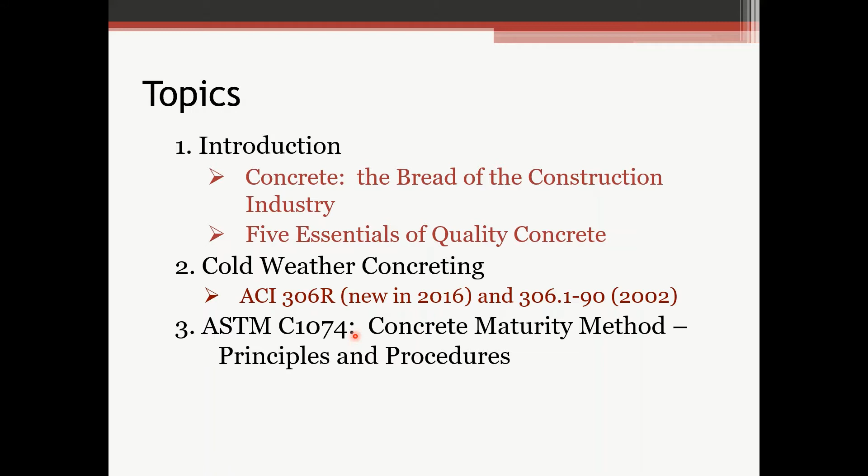I'm going to have a brief introduction on concrete, the bread of the construction industry, and the 5 essentials of quality concrete. Then we'll get into cold weather concreting. It's really going to be most of this information, and it comes out of 2 ACI documents, 306 and 306.1. At the end, we're going to talk about the maturity method, ASTM C1074, which is a non-destructive way of estimating concrete strength.

So the bread of the construction industry, concrete. When you think of bread, it's kind of a dietary staple, kind of similar with concrete to the construction industry. It's widely used, it's kind of a staple of the construction industry. It's the second most widely used material in the world, next to water, and a lot of water goes into concrete. Here we've got a general makeup of concrete by percent, by volume: 6% air.

This can obviously change depending on the application of your concrete. About 11% Portland cement, 41% gravel or crushed stone, that's your coarse aggregate, 26% sand or fine aggregate, and about 16% water. Again, these are just general numbers. It'll be different just depending on the mix you're using and what the application is for.

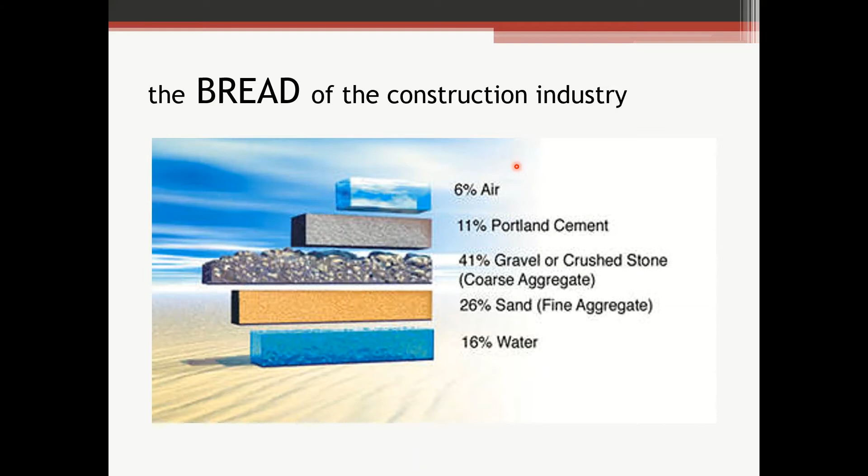But I like the term the bread of the construction industry. I didn't coin that myself, but I think it's fitting. Pretty much all the ingredients in concrete are right here in front of you, other than maybe some admixtures for the air, or controlling or changing the slump, or something like that. But similar to bread, bread doesn't have a whole lot of ingredients, but each one of them is important. And just like bread, concrete, you've got to have some quality materials going into it.

The materials need to be suitable, compatible with each other. Some admixtures are not compatible with each other. Some aggregates are not very compatible with cement, and they can react negatively and cause problems. So you want suitable, compatible materials. It's got to be mixed properly, proportioned properly, again specific to the application: interior, exterior, high performance concrete, lightweight concrete, whatever the application is.

It's got to be proportioned, mixed, and transported. A lot of people don't think about the transportation of concrete, but there's some places in the Adirondacks where concrete plants are not nearby, and you might have a long transit time. So that should be taken into consideration.

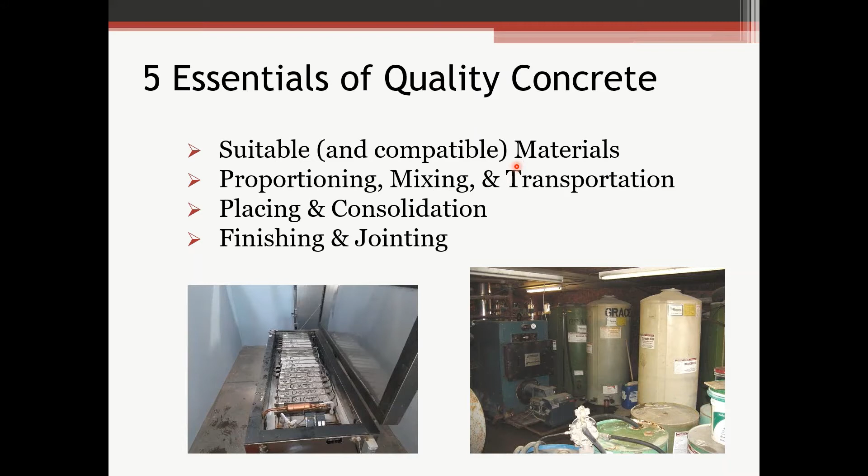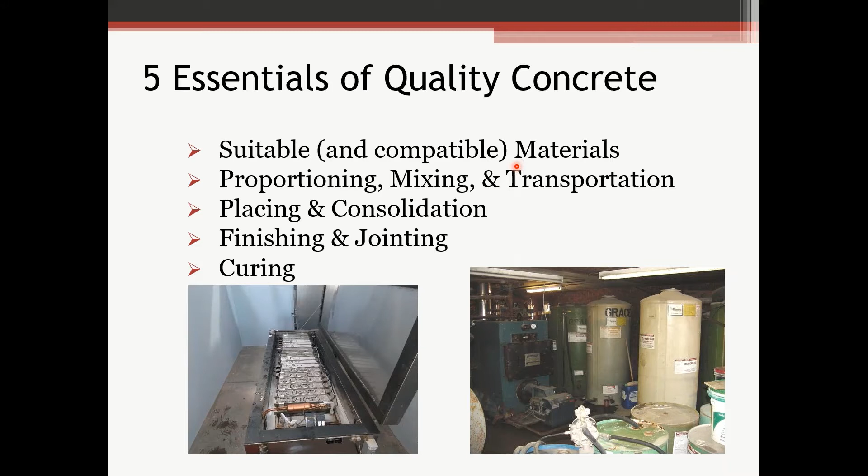Placement and consolidation. Obviously it's got to be placed, consolidated properly, and then after that you've got finishing. If it's flat work, jointing, if you've got construction joints or control joints or whatever to control your cracking, and then you've got to cure it. After you're done finishing it and jointing it, you can't just walk away - you've got to cure it and protect it properly, which is a lot of what we're going to be talking about today.

So cold weather, what is cold weather? How is it defined? ACI has a couple of different definitions for it. ACI 306.1 - I should have pointed out, the presentation is based on ACI 306 and 306.1. 306 is a guide to cold weather concreting, and 306.1 are the ACI specifications for cold weather concreting, and they can be incorporated into your project just by reference. 306.1 defines cold weather as 3 consecutive days where the average temperature is below 40 degrees, and they just take the average as the high and the low. That's it, it's not a weighted average or anything like that - it's just the high and the low for the day.

So average below 40 degrees and less than 50 degrees for half of any 24-hour period. So it's kind of weighted to a certain extent by that, but not necessarily. And then 306, the 306 definition, is when air temperature has fallen to or is expected to fall below 40 degrees during the protection period. So we see that 40-degree temperature is certainly a common theme here. Probably the most common definition is that top one - that's the one we see a lot of times in specifications, or maybe other agencies like New York State DOT or other agencies may have different definitions of cold weather when placing concrete. But these are the two definitions that ACI uses right here.

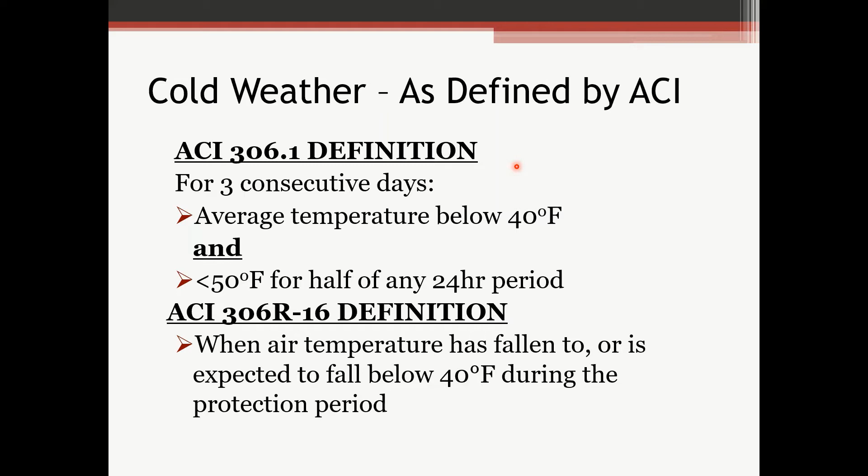So why are we talking about it? I don't know where everybody's at right now. I'm in upstate New York, just outside Albany. Starting to get cold. It's been relatively warm recently, but starting to get cold.

Construction doesn't stop when it gets cold, and there's a lot of ways that we can safely place concrete and still have it be durable, make adequate strength, and be durable.

So here's a project that's local to the Capital District, Albany area. This is Rivers Casino in Schenectady. This was done, maybe 7 or 8 years ago now. But you can see this was done in the wintertime, and I'm going to be referring to a lot of pictures from this project because the team did a pretty good job with cold weather protection on this one.

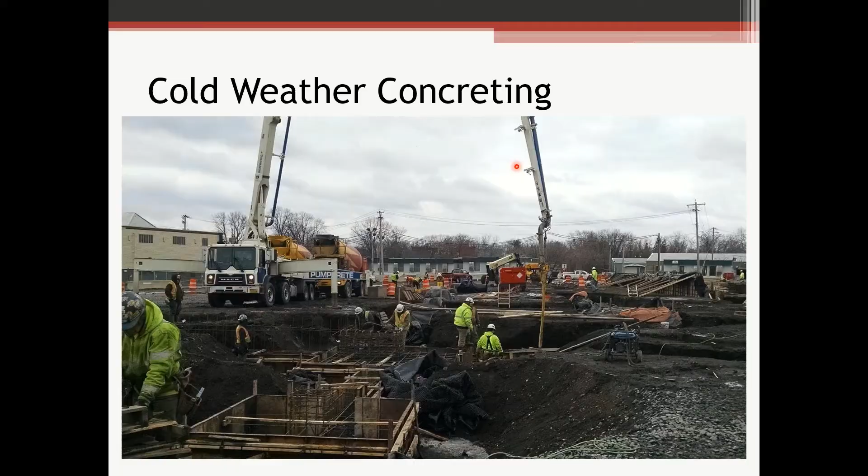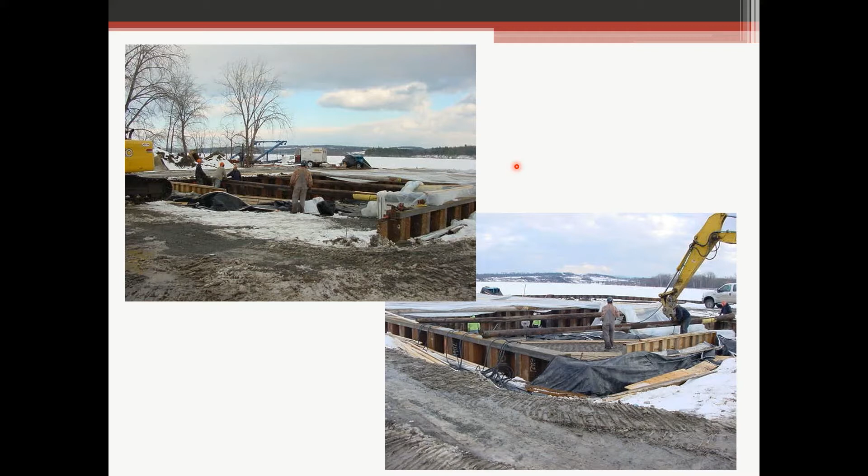Here's another project. I think this is, I didn't take these pictures, but I think this is in Ticonderoga, up around Lake Champlain. You can see it's obviously wintertime. I'll show a couple more pictures of this project also.

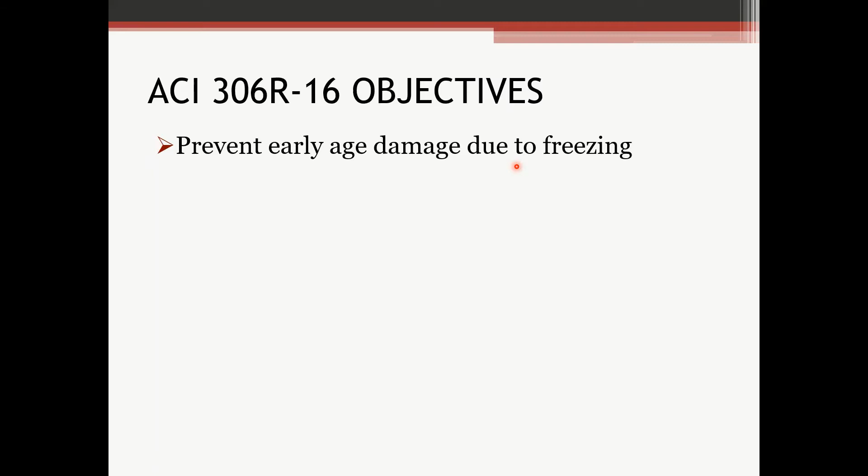So ACI 306, again, that's the guide to cold weather concreting. Objectives, main objective: prevent early age damage due to freezing. We want to ensure adequate strength gain development during and after construction, certainly during construction. Maintain curing conditions that promote strength development. We want it to make strength, obviously.

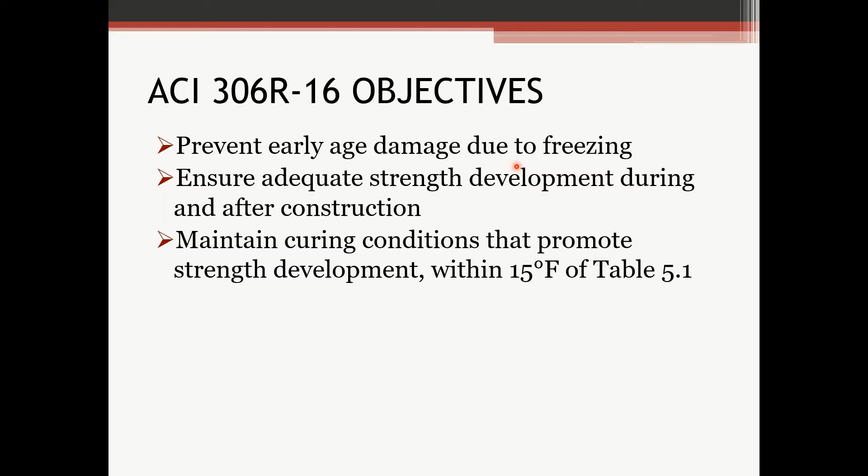Get within 15 degrees of table 5.1. I'll talk about table 5.1 here shortly, but table 5.1 has got minimum placement temperatures. There's a maximum placement temperature also. ACI recommends that you not be more than 15 degrees above the minimum placement temperature. So there's not a very big window in there for placement. Again, that's in 306R. Limit rapid temperature changes, which may cause cracks due to thermal stress. We'll talk about that.

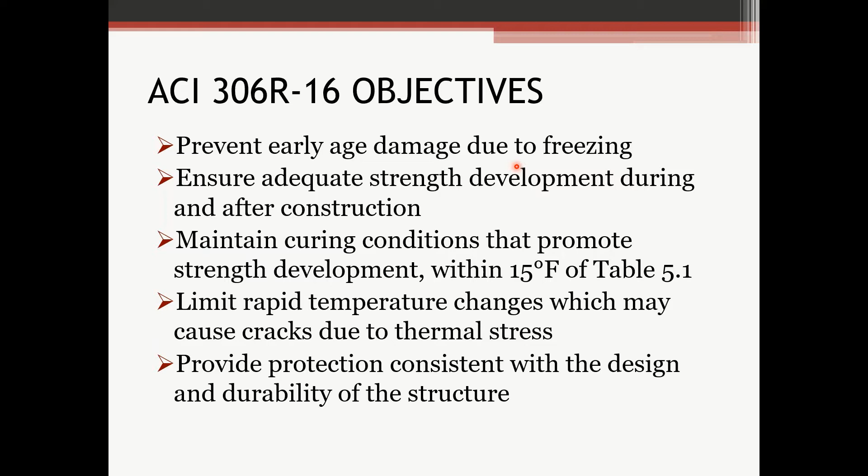And providing protection consistent with the design and durability of the structure. So these are all the objectives in 306R. Again, 306R is the guide to cold weather concreting. It's not a specification, it's just a guide. It's got a lot of really good information in it. I think it's only like 30 or maybe 35 pages long. It's a pretty easy read, and I certainly recommend reading it, it's a lot of good information.

So preventing early age damage, probably the most important thing is protection and planning. Planning for sure, you know, it doesn't just happen organically. So preventing early age damage, about 500 PSI will provide us one freeze-thaw cycle of protection. And we can usually get 500 PSI within 1 or 2 days after placement at about 55 degrees. That's a general guideline. Again, that's going to be specific to the mix.

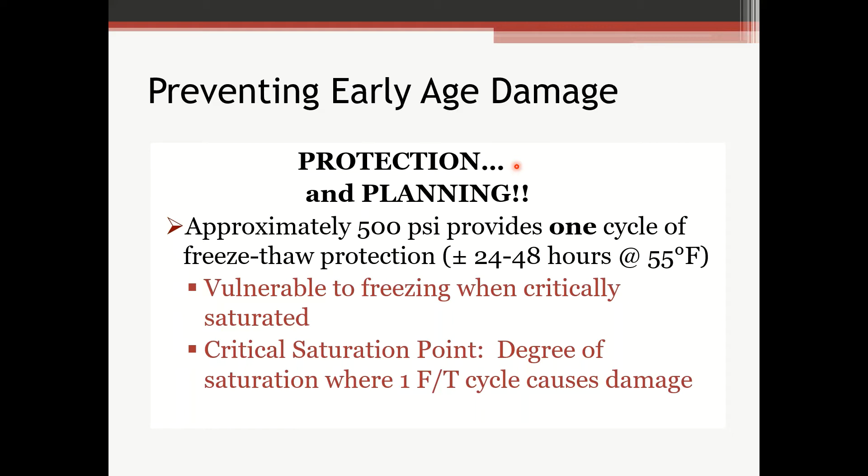If you've got multiple freeze-thaw cycles, that 500 PSI certainly isn't going to hold up to that. But one freeze-thaw cycle at 500 PSI shouldn't see anything harmful. It's obviously vulnerable to freezing when it's critically saturated early on. The concrete's still got a lot of water that hasn't, the cement hasn't hydrated, and that critical saturation point, that's the degree of saturation where one freeze-thaw cycle causes damage. That's how ACI defines the saturation point.

So prior to placement, these are ACI 306.1 requirements. So if your project or if you're referencing 306.1 in your project, these are all part of the specifications in 306.1. Concrete's got to be air entrained if it's exposed to freezing and thawing during the construction period. A lot of people don't think about that, but if you've got flat work, interior flat work that's being placed in the middle of the winter, obviously it's going to be exposed to freezing and thawing, or could certainly be exposed to freezing and thawing. That really needs to be air entrained to protect it.

People out there are going to scream and holler about the slab peeling up and not being able to finish properly. It could cause finishing problems, but as long as the finishers and people doing the flat work know that it's air entrained, it can be handled properly.

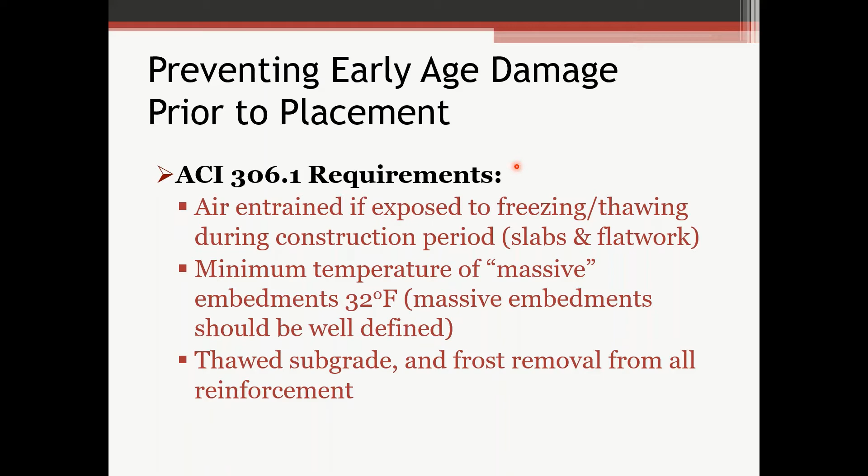Minimum temperature of massive embedments needs to be 32 degrees. Massive embedments really isn't defined very well in 306.1. Large anchor bolts, things like that, just those large steel embedments that are going to retain a lot of cold. Obviously concrete's not going to bond to frozen rebar very well, if at all. Thawed subgrade's got to be thawed out, and frost has got to be removed from all reinforcements. So those are all the requirements in 306.1. There's obviously more requirements, but those are some of the big ones.

This is that project in Ticonderoga.

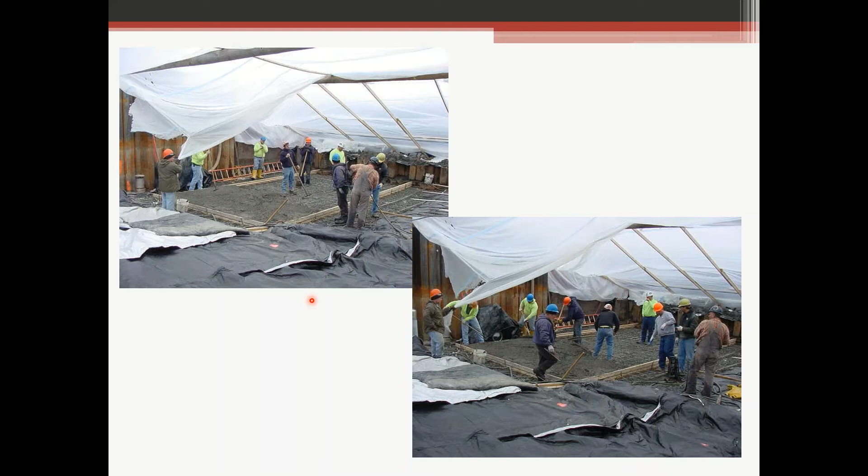You can see they kind of protected it a little bit from the wind. You can't see any heaters in here, but there are heaters in here, glycol heating lines. This is a blanket—they had a blanket over the subgrade, heating it overnight, and you can see they're placing the slab over here. So the subgrade was thawed. They've got a little bit of protection, a little bit of heat, and then they're going to put those blankets back on and protect the slab after it's placed.

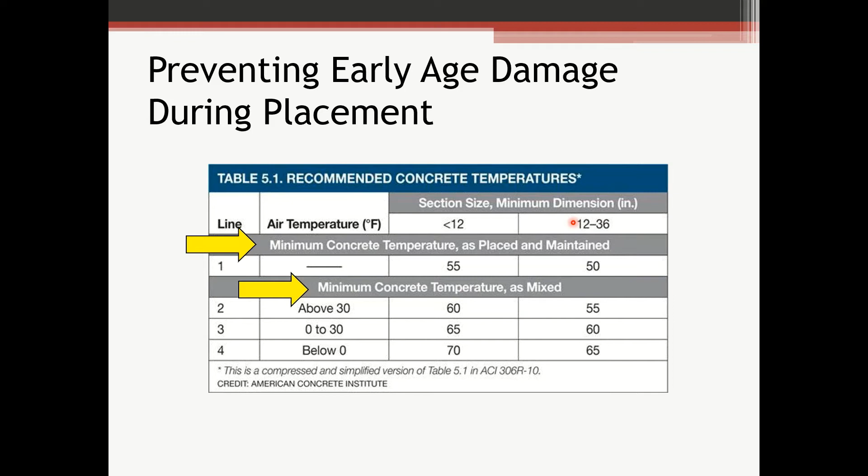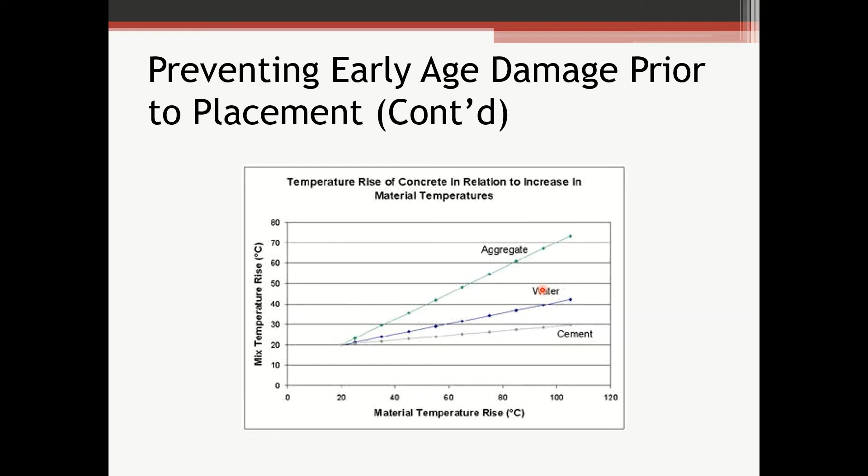You can heat up your water also. It's a lot easier to heat up water, but it's not quite as efficient when it comes to the overall temperature rise. You can heat up the cement too—I don't see that happening very often, but maybe if you got a fresh batch of hot cement, that might help you, but could cause other problems also. Definitely heating up the aggregate is going to give you the most bang for the buck. Heating up the water is usually easiest, but this graph just gives you an idea of what you can expect.

So here's the first question. Should be a true-false question. It reads: true or false, ACI allows concrete to be placed on frozen subgrade. Hopefully everyone gets this right. I see all the answers also, so if there's anybody out there that gets the wrong answer, you might get a little jab from me down the road.

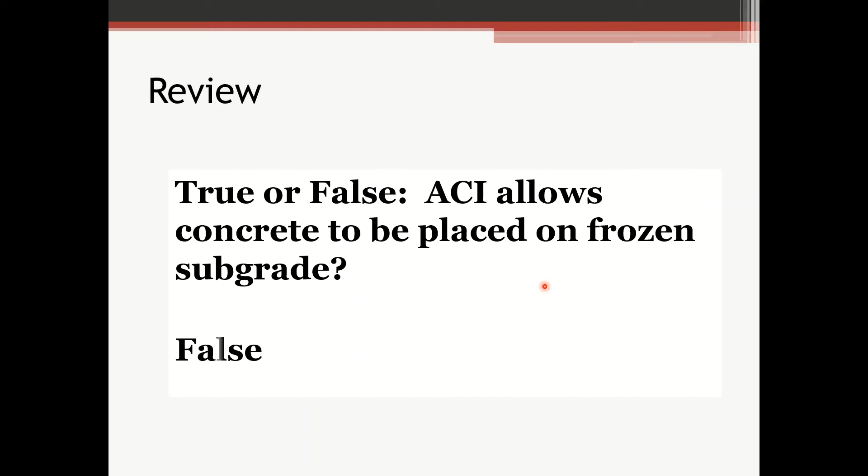Protecting for strength development, we have a protection period. This is from ACI 306, these are the guidelines. The protection period can vary based on what's being placed, the type of concrete, and other factors. But these are the recommendations from ACI for the number of days for your protection period.

It's kind of based on the service condition, where it says load, no load - the load is during the curing period, so that's during the first 28 days. The exposure is based on its service condition, not the curing condition. So no load, not exposed - this is no load during the curing period, and not exposed. The exposure is freeze-thaw exposure.

So this first line here, no load, not exposed - that could be maybe a footing that's down below the frost line, that's really not going to see much of a load during the first 28 days, and in its service condition it's hopefully down below the frost line. So for normal concrete, the protection period is 2 days. If you've got accelerated set concrete, maybe an accelerator in the mix or type 3 concrete, that protection period is only 1 day.

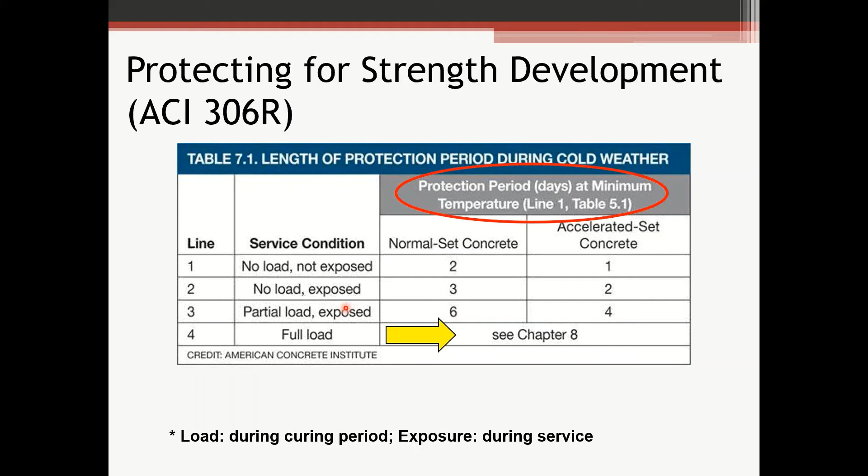So how do we protect the concrete? What's the best way to protect it? 306 gives us a lot of information on protecting the concrete, how to protect it, what kind of protection we need, and it's using the heat of hydration to our advantage - after the concrete's placed, we want to keep all of that heat in the concrete, whatever was placed and formed up.

This is a table in ACI 306, section 7.3.2. I think this is the 2010 version of 306. In 2016 they changed it up a little bit - the information stayed the same, but the tables changed, the layout changed a little bit, and it just didn't present as nicely. So I kept this version from 2010.

So what this particular table is telling us is what R value we need for different ambient air temperatures. This is assuming that everything was placed at 50 degrees - that's Table 5.1, placed at 50 degrees. And assuming all these conditions are met, in theory it should maintain that 50 degree temperature for 3 days if we're doing all of this.

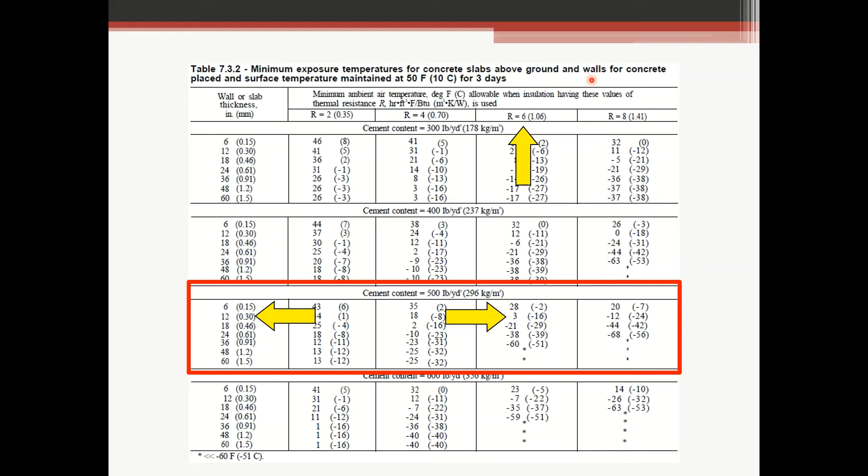So this R value of 6 - let's keep that in mind. How do we get to an R value of 6? 306 has got different R values for different types of material. So this is for 1 inch of expanded polyurethane, which has got an R value of about 6.25. Expanded polystyrene, 4 to 5, glass fibers, 4, mineral fibers, so on and so forth. So if you've got 3/4 inch plywood as your formwork, you've got about an R value of 1 right out of the gate.

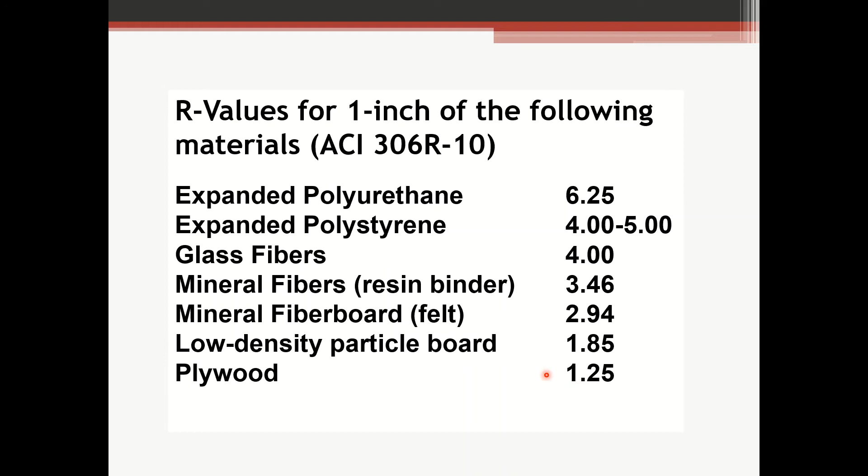So this is good information. Also, if they're using blankets that are specifically for concrete, concrete curing blankets, most of them, I'll say the good ones, have tags on them, and these tags will say what's in it, and a lot of times these tags also give the R value.

So take a look at the tag, see what the R value is. If you need an R value of 6 and you've got maybe an R value of 1 from your formwork, and these blankets are about 1/2 inch, and maybe each 1/2 inch gives you 2 or 3 R value, double them up and you're getting to that 5 or 6 value that we would need for a 12-inch wall at 3 degree ambient air temperature.

So we're up to question number 2. Another true-false question should read: ACI 306.1, those are the ACI specifications, requires concrete that would be subjected to freezing during the construction period to be air entrained. True or false?

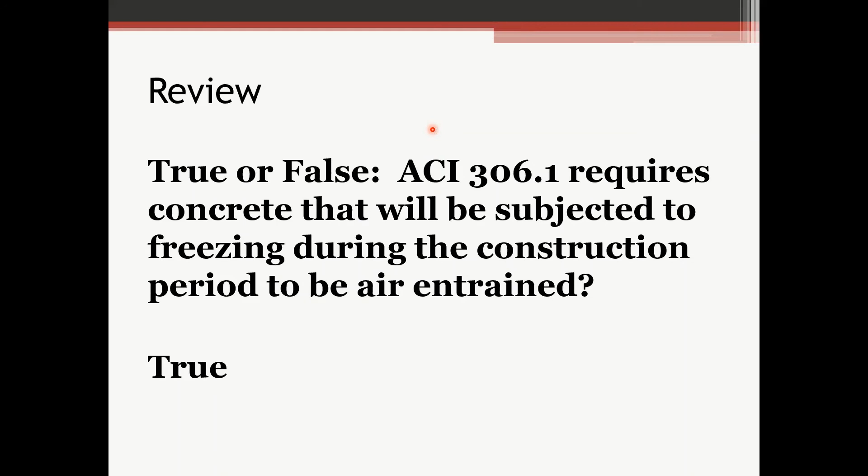The poll is closed. Back to you, Steve. Hopefully everyone got that one. That is true. Something you wouldn't always consider, but should be considered.

So here's another picture from Rivers Casino. We can see we've got two pier footings here being heated up. There's no concrete in here. They're just heating the enclosures to make sure that everything's thawed out, subgrades all thawed out.

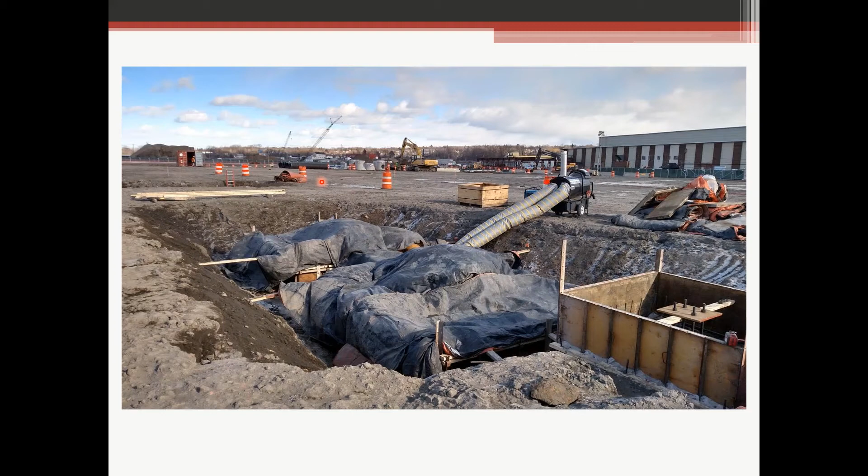On one of the very first slides in this presentation, I mentioned planning. If you look around, just a few things that you see: a whole bunch of blankets piled up over here, a heater right here, more blankets over here. This was, I want to say, early or mid-January. It's kind of hard to tell, but it's single digits out here, and that subgrade was pretty much rock hard. But they planned for it.

Things went well. This is a pier after it was placed. You can see there's multiple blankets wrapped around it. Very important, they've got the corners tied up right here so it's not blowing around. Put multiple blankets on there, and make sure the blankets are tied up nice and tight so they're not going to blow off. And again, looking around here, we can see good planning with all the different equipment that they've got set up.

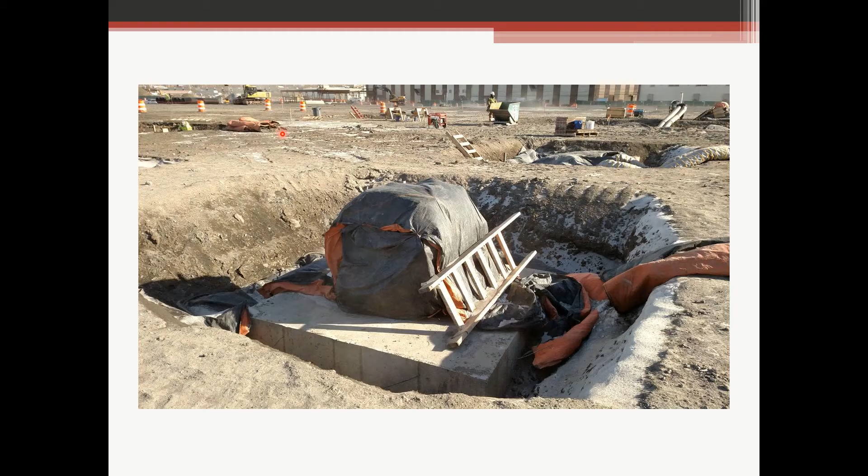Here's another photo, same job. This is a foundation wall. I believe it was a 12-inch wall, multiple blankets on here. The other thing that's here that you didn't see in the other pictures was the glycol heating line. This placement was also heated using a glycol heater. But again, you can see they're tied up pretty good. Might flap around a little bit right here, but for the most part, it's on there pretty secure.

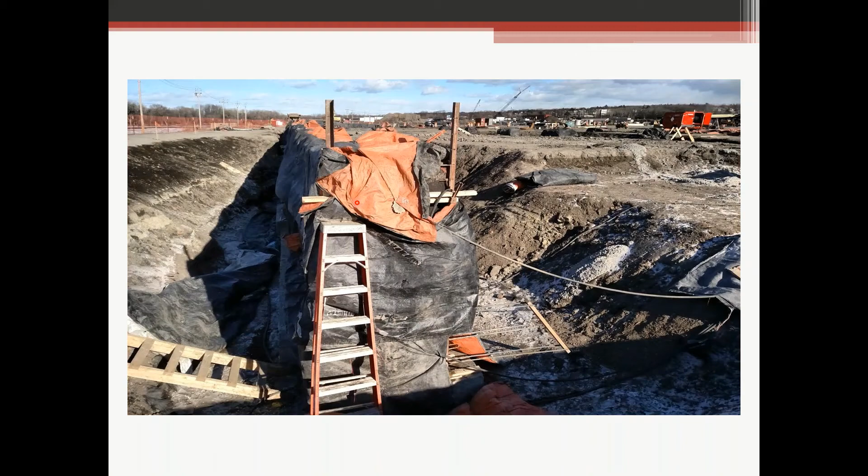What this contractor did was they just left the blankets in place until they needed them. Some of the blankets stayed on for over a week. So they just left them in place until they needed them. They had plenty of blankets. So good planning here.

So one thing we want to do is avoid rapid temperature changes. We want to make sure that we're cooling gradually, so we're not inducing any kind of thermal shock. Concrete is kind of like untempered glass or ceramic, where it's susceptible to thermal shock if temperature changes too much too quickly. So we want to make sure that we're moving our heat slowly if we do have heat. Take thermal blankets off slowly, maybe one at a time, or maybe just leave them in place until the surface underneath stabilizes with the ambient temperature. But we definitely want to avoid those rapid temperature changes.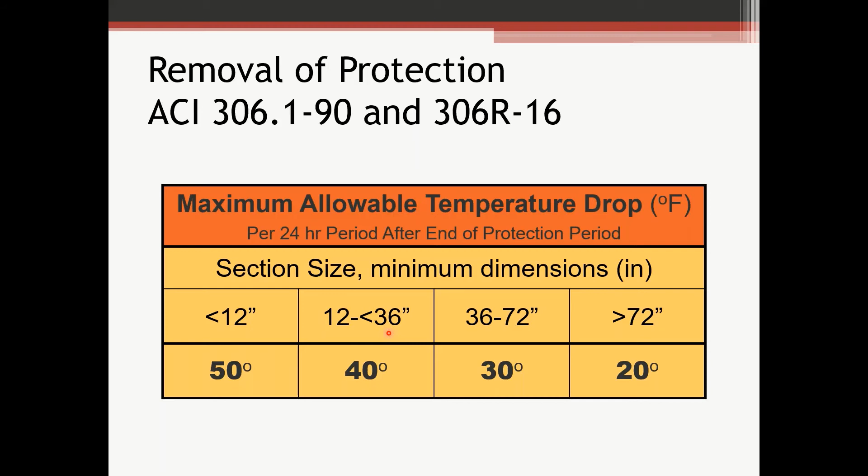And we're on to question 3. It should read, do we need to control the rate at which we allow the temperature to drop at the end of the protection period? I try to sprinkle the questions throughout the presentation rather than have them all at the end, hoping that I addressed them well and they're fresh in everyone's mind so they get the right answers.

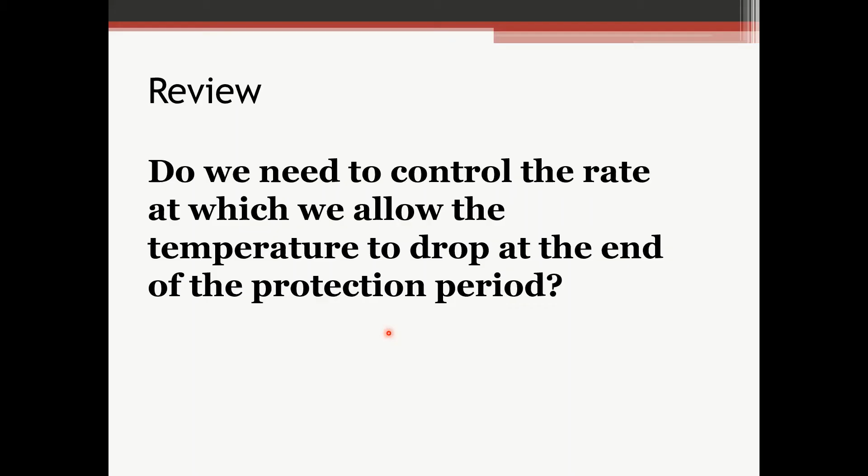Chapter 8 recommends doing different types of things, non-destructive testing, maybe field cured cylinders. On that project at Rivers Casino in Schenectady, we did do some field cure cylinders. We didn't do field cured cylinders for every placement, but we did for quite a few of them. I think once they proved their curing methods and protection was adequate, we kind of started to get away from making those field cure cylinders.

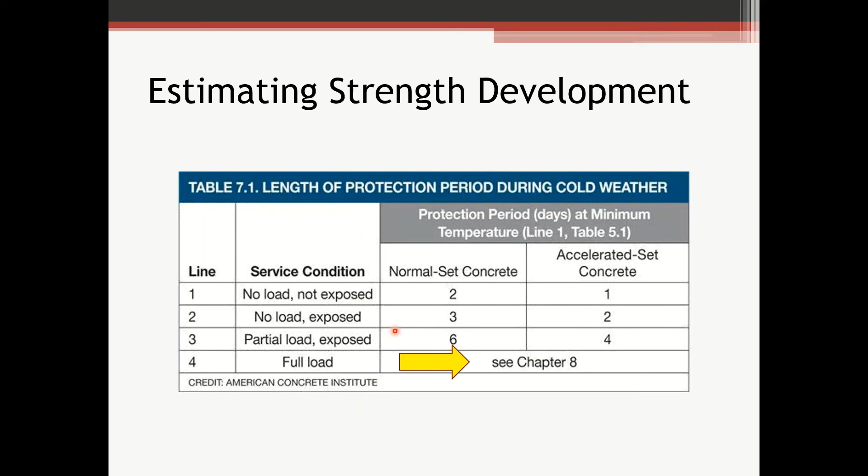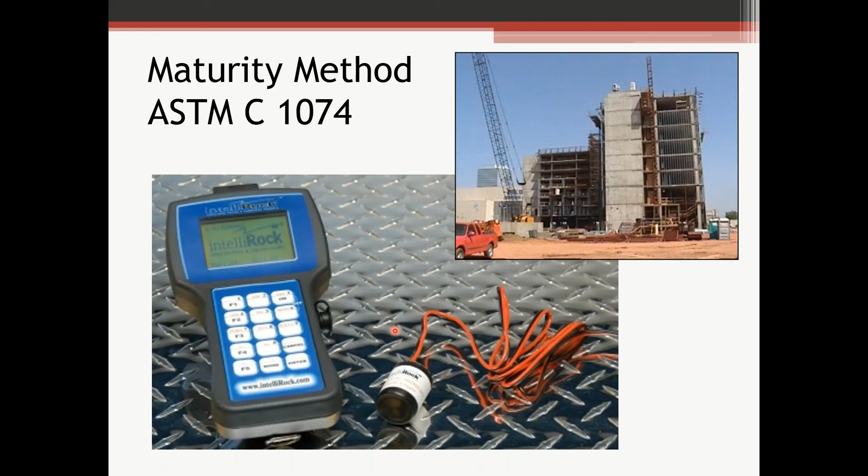But in any event, it refers you to Chapter 8 to do different things. One of the things it mentions in Chapter 8 is the maturity method, ASTM C1074. And again, the maturity method is just a way to non-destructively estimate the concrete strength using basically time and temperature. So the primary concept of the maturity method says a given combination of curing time and concrete temperature results in a specific strength for a given concrete mixture. In other words, concrete strength is a function of time and temperature. I think we all know that.

Colder temperatures, concrete strength develops much slower. Down below 40 degrees, there's a reason why 40 degrees is mentioned in both of the ACI documents. Below 40 degrees, cement hydration slows down significantly. And obviously right at about 32 degrees, it stops completely because your water turns into a solid and it just doesn't hydrate the cement.

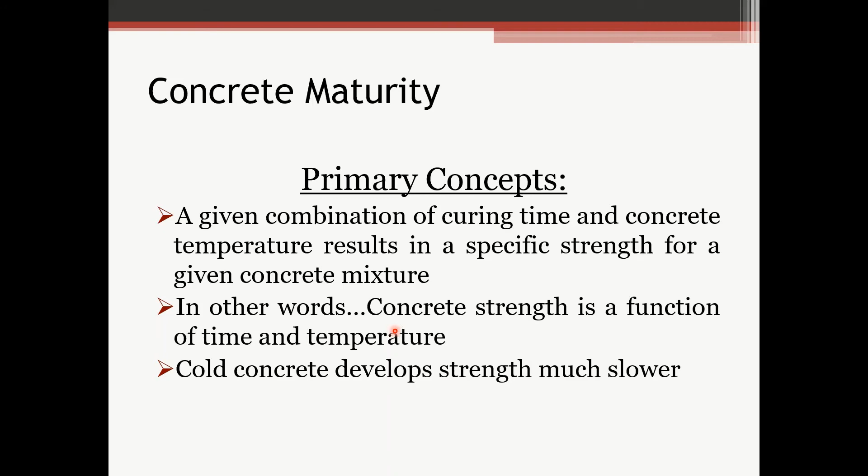So we've got two different concrete maturity functions we're going to talk about, not in great detail, but we'll talk about them a little bit. The first one is the temperature time factor, and this is from some research that Nurse and Saul did back in 1951. It says concrete of the same mix at the same maturity—and the maturity is just a product of time and temperature—has approximately the same strength, whatever combination of time and temperature go to make up that maturity.

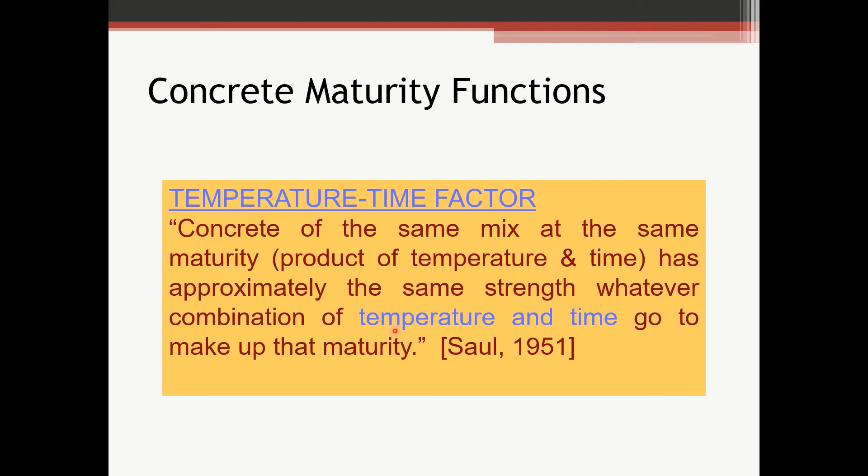This is the time temperature maturity function. So you've got this, your time temperature at age t. Delta T is your time interval in hours. You're measuring temperatures typically every half an hour, sometimes every 15 minutes. But T sub A is the average concrete temperature during the time interval, during that delta T time interval—so during that 15 minutes or half an hour, 1 hour, whatever your interval is.

And T sub 0 is the datum temperature, which is the temperature at which strength development stops. Some people use 0 — most of this is in Celsius. Some people use 0 for datum temperature. The ASTM gives a little bit of guidance in the appendix on what to use, but 0, 1, or 2 degrees Celsius is pretty typical for a datum temperature. So you can see it's just a summation of all of the times and temperatures together — there's your product of time and temperature. It's kind of the area under the curve.

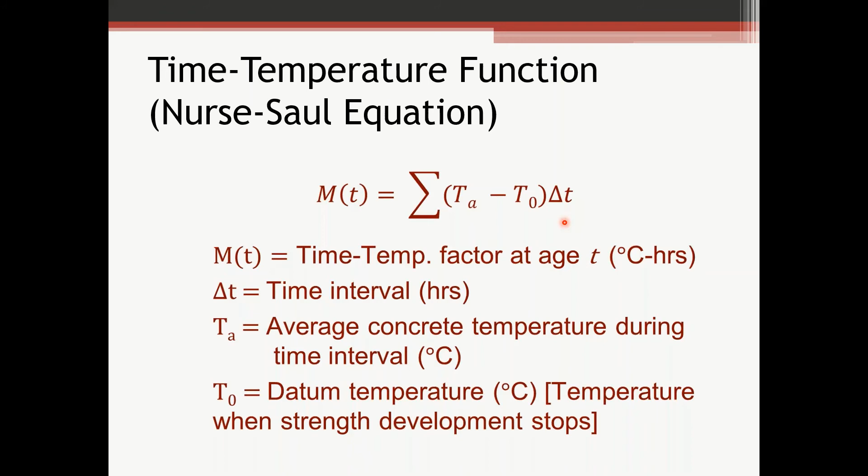So the other maturity function is the equivalent age factor. And this is the number of days or hours at a specified temperature — here we're keeping the temperature constant. It's the number of days or hours at a specified temperature required to produce a maturity equal to the maturity achieved by a curing period at temperatures different from the specified temperature.

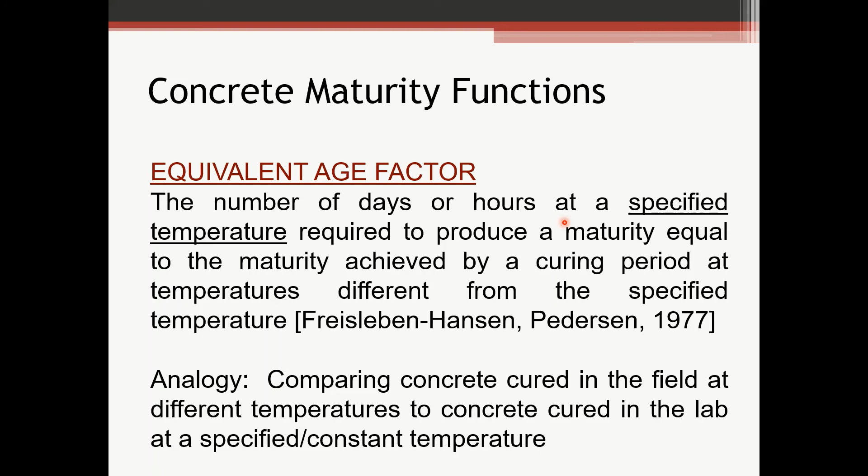Couldn't really find a better way to word that, so I worded it how they did back in 1977. A good analogy is we're comparing concrete cured in the field at different temperatures to concrete cured in the lab at a specified temperature. We cure concrete in the lab either in tanks or in a cure room at about 68 degrees or something like that. So this could be a good way of comparing what you got in the field at varying temperatures compared to what we've got in the lab.

Here's the equivalent age function. It's based on the Arrhenius equation. If there's any chemical engineers out there, the Arrhenius equation is a way of estimating the speed of a chemical reaction. And if you think about it, that's kind of what we're doing here with the hydration of the cement and the heat of hydration.

So T sub E, that's your equivalent age in hours. Q is the activation energy divided by the gas constant K. T sub A is the average concrete temperature during your interval, delta T. T sub S is the specified temperature. That's the temperature that is remaining constant - remember, that's our laboratory temperature, or whatever temperature we're keeping constant.

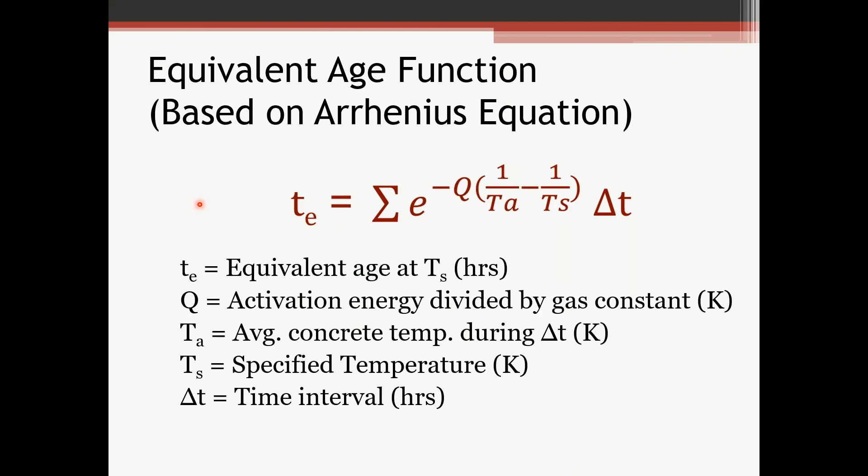Obviously, this is not a linear equation. The previous equation is a little bit more of a linear type function. This certainly is not, with that funky exponential function in there. Some people say this does a better job of estimating the concrete strength at later ages, and the Nurse-Saul equation does a better job of estimating at earlier ages. The Nurse-Saul equation is probably the more common one.

So we got the two equations, we kind of know what the idea is, right? Concrete strength is a function of time and temperature. So how do we apply that? What do we do with that information? How do we use that in the field when it's 3 degrees outside or something like that, and we need an idea of what our concrete strength is.

It starts in the lab. You got to cast cylinders, at least 15 cylinders. It's got to be the same mix that's being used out in the field. So if you're using a 5,000 psi mix out in the field, this is the mix that we make in the lab and make these cylinders. We put maturity sensors in a couple of the cylinders, and then we start to test the cylinders. We're not testing the ones with the maturity sensors in them, obviously. We're testing the other ones.

Either 2 or 3 if you're making 4x8 cylinders, get the average, and then test them at 1, 3, 7, 14, 28 days, maybe a little bit more frequently for a high early mix. We've done this at 2 and 4 hour intervals over 24 hours, so loads can be applied, roadways can be opened up, things like that, for some high early mixes.

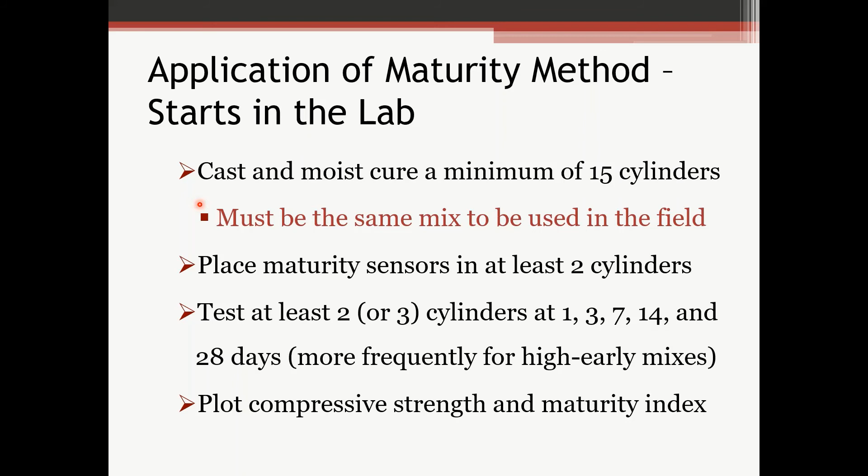And then you just plot the compressive strength and the maturity index. So each time you break a cylinder at 1 day, you're taking a reading off of the cylinders that have the maturity sensors in them. So you're getting that maturity value at the time you're testing the cylinder or cylinders, and you get a curve that looks something like this. You've got your maturity on the x-axis, and again, it's just a product of time and temperature. That's it. And then you've got your compressive strength, and you get a plot that looks something like this.

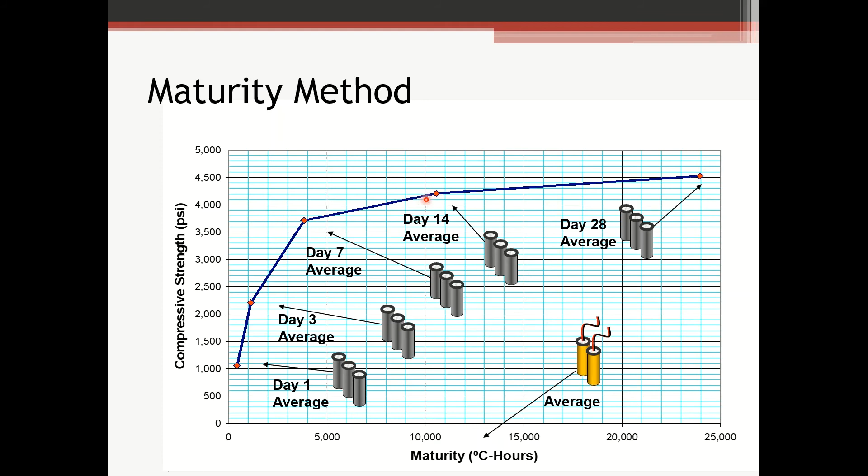And you apply this in the field by measuring what your maturity value is in the field. If you've got 10,000 degree hours in the field, that's what you measured in the field, then theoretically you've got about 4,000 psi on the structure. Again, we're doing this first in the laboratory. These are these maturity functions - those graphs are specific to the mix.

So after we do that in the lab, we can install the maturity sensors in piers, footings, bridge abutments, whatever. Maybe at some critical loading locations. You want to avoid touching the sensors to reinforcement. You can tie them to the reinforcement, but just don't have them physically touching them. Usually the sensor itself is not touching the reinforcement, and then you just monitor the maturity index for strength gain.

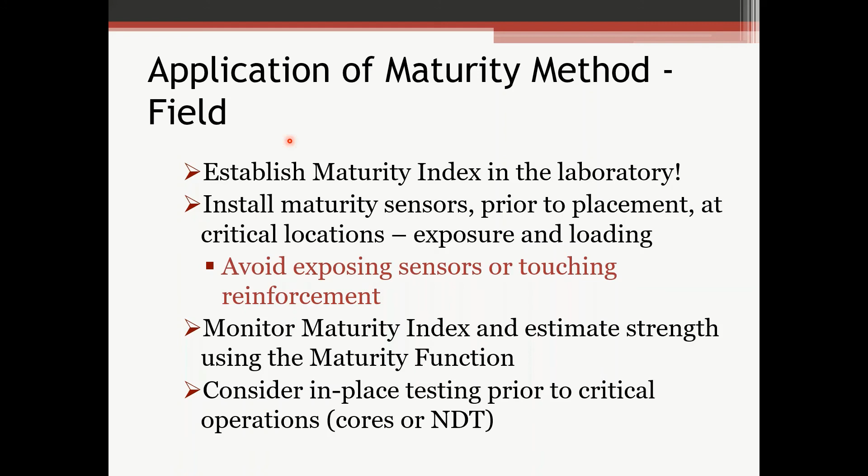And then you just figure out what your maturity value is. Go to the plot and figure out what your estimated strength is. If you've got some critical operation that you're doing, maybe you want to consider some other things also - maybe cores, maybe some other non-destructive method, Windsor probe, rebound hammer, pulse velocity. Maybe you've got some field cure cylinders that you want to break or something like that. Again, this maturity method is just one of the ways. It's just one of the methods that's referenced in ACI 306.

All right, we're on to question number 4.

Should read, what are the 2 parameters that we measure for the maturity functions? Concrete strength is a function of blank and blank.

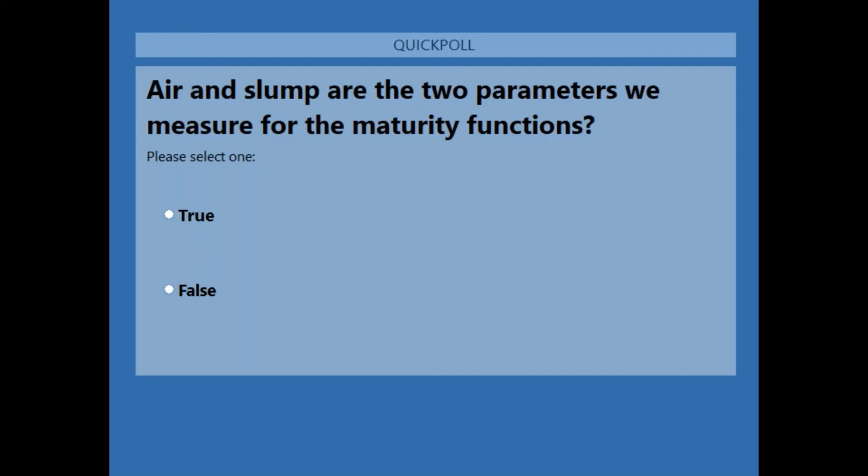The poll is closed. Back to you. Obviously, that's time and temperature. We've been talking about that for the last 5 or 10 minutes or so.

Next question, should also be a true-false question. The equivalent age maturity function assumes that concrete strength gain is linear based on time and temperature. That's the equivalent age, that's the one where we're keeping concrete temperature constant.

And the poll is closed. Back to you. That is false, it's not linear. It is based on the Arrhenius equation, that's got that funky exponential in it.

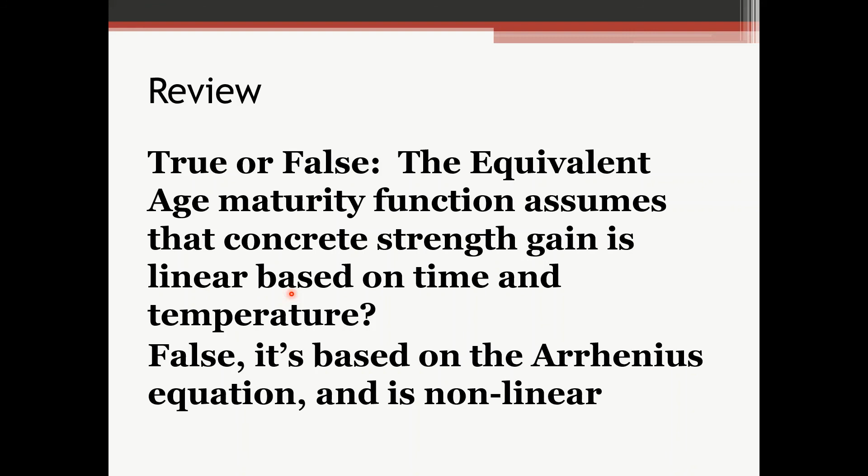And that wraps it up. So we do have time to get to some questions if people have got questions.

We do have a question posed. The question was, can you explain whether there is anything additional that needs to be done with lightweight concrete? The aggregate has to be soaked prior to batching, and I am wondering if there's anything else that needs to be taken into account that would be different than normal weight. And this was from Adam Heisler. That's a great question. A few years back, maybe closer to 10 years back, we did some lightweight concrete placements, and

Nothing additional was required. The aggregate does need to be soaked, otherwise that lightweight aggregate's gonna, believe it or not, float up to the top if it's not soaked properly. You would think because of the additional water and moisture that's in there, additional protection measures are needed, but that's really not the case.

And a lot of times lightweight concrete has got even more cement in it than a conventional mix, so that additional cement adds an additional heat of hydration. So the answer is no, no additional measures need to be taken.